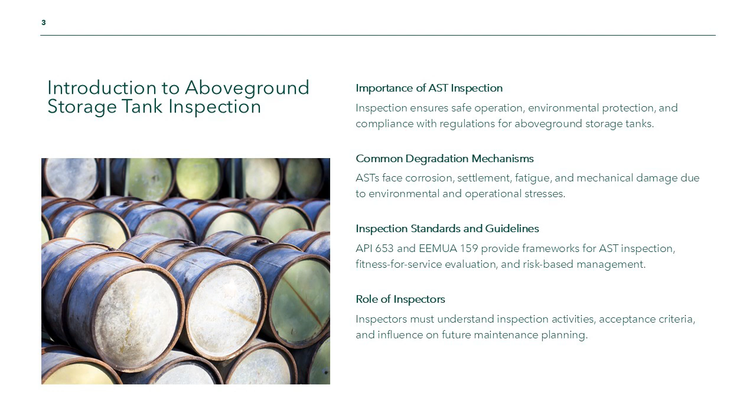The scope of AST inspection under API 653 and EEMUA 159 includes both on-stream and off-stream activities, each serving distinct but complementary objectives. On-stream inspection refers to examinations performed while the tank remains in service, typically focusing on external components, accessible areas, and condition monitoring techniques that do not require product removal.

The primary objective of on-stream inspection is early detection of deterioration, confirmation of continued fitness for service, and identification of conditions that may necessitate corrective action or an out-of-service inspection.

Off-stream inspection, by contrast, is conducted when the tank is taken out of service, cleaned, and made safe for internal access. Its objective is to allow detailed examination of the tank bottom, internal shell surfaces, welds, and other critical areas that cannot be adequately assessed during operation. Together, these inspection types support a life cycle approach to tank integrity.

API 653 defines minimum inspection intervals, examination methods, and acceptance criteria, while EEMUA 159 emphasizes inspection planning based on risk, degradation mechanisms, and consequence of failure. Inspectors should understand that inspection is not an isolated activity but part of an integrity management loop that includes data collection, assessment, decision-making, and follow-up actions.

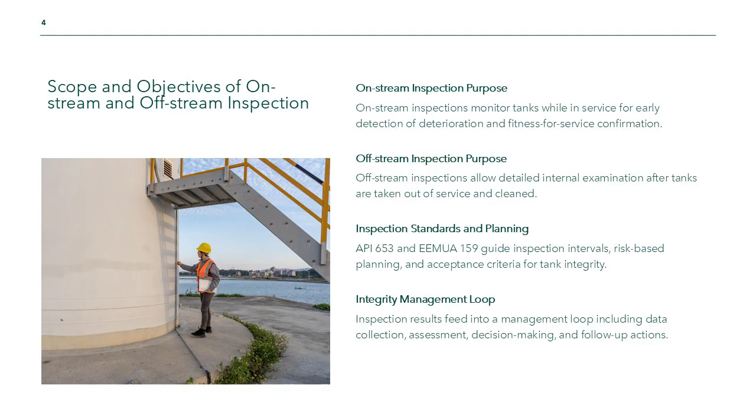API 653 and EEMUA 159 are the primary standards governing the inspection and integrity management of above-ground storage tanks. API 653 provides detailed, prescriptive requirements for inspection intervals, examination techniques, minimum thickness calculations, acceptance criteria, and repair methods. It is particularly strong in defining what must be done to demonstrate compliance and continued fitness for service.

EEMUA 159, on the other hand, focuses on integrity management principles, encouraging a holistic and risk-based approach that considers degradation mechanisms, operational history, inspection effectiveness, and consequence of failure. While API 653 is often used as the regulatory or contractual baseline, EEMUA 159 supports more optimized inspection strategies through risk-based inspection, RBI, and long-term maintenance planning.

Inspectors should be familiar with both documents and understand how they complement each other. In practice, API 653 requirements are typically treated as minimum standards, while EEMUA 159 provides guidance on enhancing inspection planning, prioritizing resources, and justifying interval extensions or alternative inspection techniques.

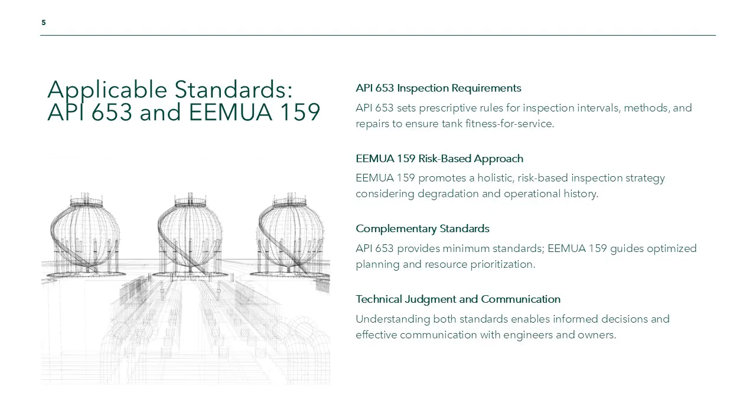Knowledge of both standards enables inspectors to make sound technical judgments, communicate effectively with engineers and asset owners, and ensure that inspection findings are evaluated within an appropriate integrity management context.

Purpose and limitations of on-stream inspection: external visual inspection of tank components, shell thickness measurement and corrosion monitoring, roof, settlement, and ancillary system checks. On-stream inspection plays a crucial role in monitoring the condition of above-ground storage tanks while they remain in service. The primary purpose is to identify visible deterioration, monitor corrosion rates, and confirm that the tank continues to operate safely within its design and assessment limits.

On-stream inspections help detect issues such as external corrosion, coating breakdown, leaks at nozzles, roof damage, settlement, and malfunctioning ancillary systems. These inspections also provide data to validate corrosion assumptions, update inspection intervals, and determine whether an off-stream inspection should be advanced. However, inspectors must clearly understand the limitations of on-stream inspection.

Internal components such as the tank bottom, annular plates, and internal shell surfaces cannot be directly examined while the tank is in service.

Indirect techniques, such as ultrasonic testing, UT, of the shell or settlement monitoring, provide valuable information but do not replace the need for internal inspection. API 653 specifies minimum external inspection intervals, while EEMUA 159 emphasizes understanding inspection effectiveness and uncertainty.

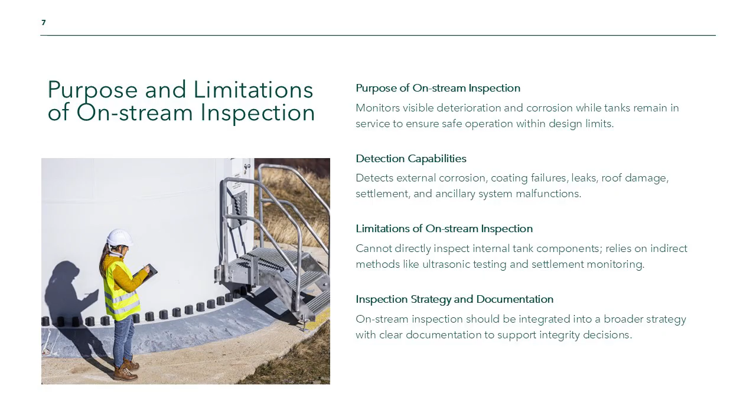Inspectors should therefore treat on-stream inspection as part of a broader inspection strategy, recognizing both its strengths and its inherent constraints. Clear documentation of findings and limitations is essential to support informed integrity decisions. External visual inspection is the foundation of on-stream tank assessment and should be conducted systematically and thoroughly.

Inspectors should examine the shell for signs of corrosion, coating degradation, bulging, denting, cracks, or product staining that may indicate leakage. Roof systems, whether fixed or floating, should be inspected for structural damage, corrosion, missing components, or abnormal deformation. Particular attention should be given to roof seals, pontoons, drains, and support structures.

Nozzles, manways, and flanges should be checked for leaks, gasket deterioration, and corrosion at the shell-to-nozzle interface. The tank foundation and surrounding area should be assessed for evidence of settlement, erosion, cracking, or inadequate drainage. API 653 requires regular external visual inspections, typically at intervals not exceeding 5 years, while EEMUA 159 encourages more frequent walkdowns based on risk and operating conditions.

Inspectors should use checklists to ensure consistency and completeness, take photographs to document conditions, and record observations in sufficient detail to support trend analysis. External visual inspection often provides the first indication of developing integrity issues and is therefore critical to effective tank management.

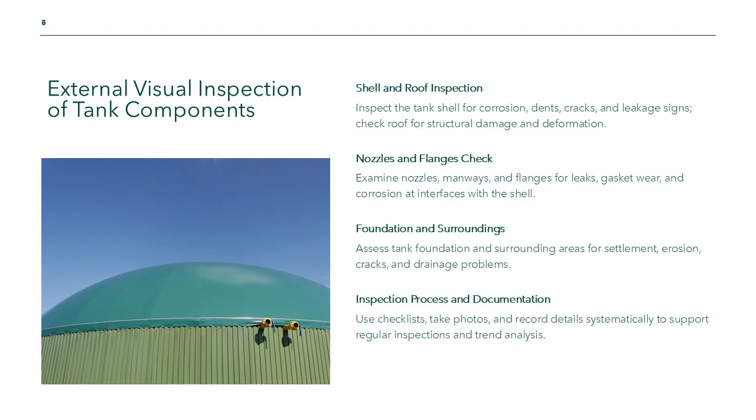Shell thickness measurement using ultrasonic testing is a key element of on-stream inspection under API 653. The objective is to determine remaining wall thickness, calculate corrosion rates, and verify compliance with minimum required thickness values. Measurements should be taken at representative locations on each shell course, with increased coverage in areas where corrosion is suspected or where historical data indicates higher corrosion rates.

API 653 provides guidance on the minimum number of measurements and the evaluation of results, including the calculation of remaining life and inspection intervals. Inspectors should ensure that UT equipment is properly calibrated, surface preparation is adequate, and measurement locations are accurately recorded for repeatability.

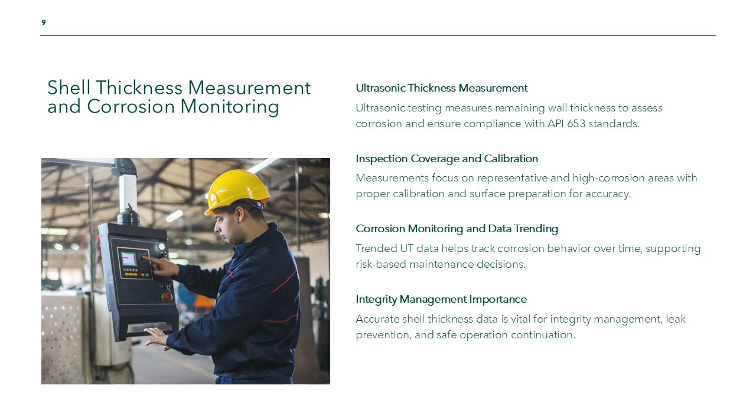EEMUA 159 emphasizes the importance of corrosion monitoring within an integrity management framework, including understanding corrosion mechanisms, variability, and uncertainty. UT data should be trended over time to identify changes in corrosion behavior and to support risk-based decision-making. Accurate shell thickness data is essential for ensuring structural integrity, preventing leaks, and justifying continued operation.

In addition to shell inspection, on-stream inspection must address roofs, foundations, and ancillary systems that contribute to overall tank integrity. Floating roofs should be inspected for pontoon integrity, deck corrosion, seal condition, and proper drainage, as failures can lead to product loss and emissions. Fixed roofs require examination of plates, rafters, columns, and vents to ensure structural soundness and adequate pressure relief.

Settlement monitoring is critical, as uneven settlement can introduce high stresses in the shell and bottom. Inspectors should review settlement survey data, visually assess foundation condition, and look for signs of distortion. Ancillary systems such as cathodic protection, fire protection, and overfill prevention devices should also be checked for operability and condition.

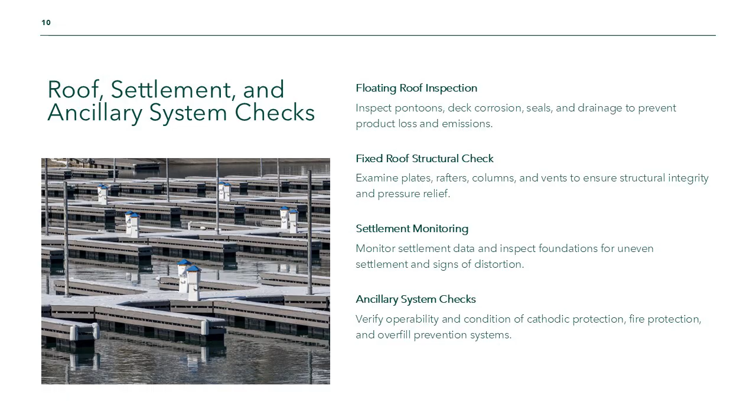API 653 references these elements, while EEMUA 159 places them within a broader risk and consequence context. Comprehensive on-stream inspection ensures that all elements influencing tank safety are considered, not just the primary pressure boundary.

Purpose and preparation for off-stream inspection, internal visual inspection of bottom and shell, tank bottom inspection using MFL and UT, evaluation, acceptance criteria, and hydrotesting.

Off-stream inspection provides the most detailed and reliable assessment of above-ground storage tank condition and is a cornerstone of API 653 compliance. The primary purpose is to enable full internal examination of the tank bottom, internal shell surfaces, welds, and critical zones that cannot be adequately assessed while the tank is in service. Proper preparation is essential to ensure both safety and inspection effectiveness.

This includes removing product, cleaning the tank, gas freeing, and confirming that the atmosphere is safe for entry. Confined space entry procedures, permits, and safety briefings must be strictly followed. Inspectors should review historical inspection data, repair records, corrosion rates, and risk assessments prior to entry to focus inspection efforts on the most critical areas.

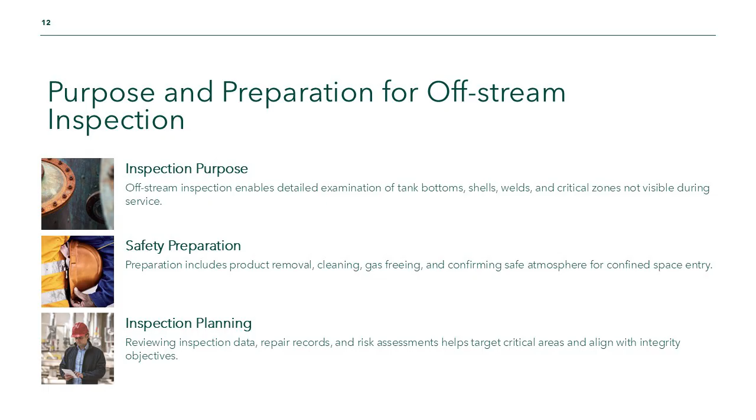EEMUA 159 emphasizes planning inspections based on expected degradation mechanisms and risk, rather than a purely checklist-driven approach. Effective preparation ensures that off-stream inspection activities are efficient, thorough, and aligned with integrity management objectives. Internal visual inspection is the first step once safe entry into the tank has been established.

Inspectors should systematically examine the tank bottom for general corrosion, pitting, grooving, and localized thinning, paying particular attention to the annular ring and critical zone near the shell-to-bottom weld. Evidence of underside corrosion, product contamination, or water accumulation should be noted.

Internal shell surfaces should be inspected for corrosion, coating breakdown, weld defects, and mechanical damage. Weld seams, including vertical and horizontal joints, should be closely examined for cracking or corrosion-related defects. Visual inspection findings guide the selection and extent of non-destructive examination such as MFL or UT scanning.

API 653 requires thorough internal visual inspection, while EEMUA 159 stresses understanding degradation patterns and their implications for future integrity. Accurate and detailed recording of visual observations is essential for subsequent assessment and repair planning.

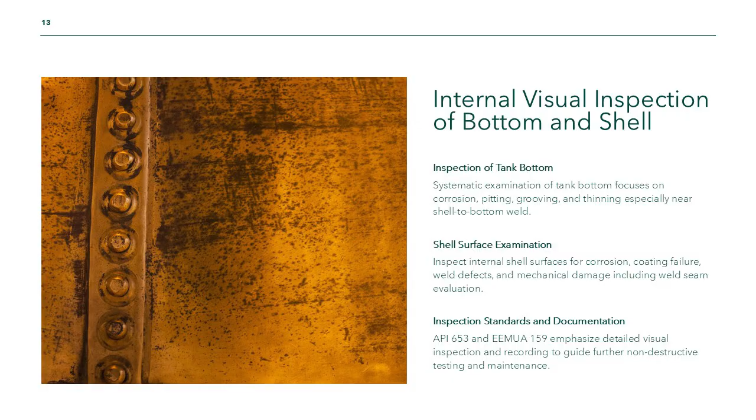Tank bottom inspection is one of the most critical components of off-stream inspection due to the high risk associated with bottom leaks. Magnetic flux leakage, MFL, scanning is commonly used to provide full coverage of the tank floor, identifying areas of metal loss, pitting, and corrosion.

MFL results should be reviewed by qualified personnel and followed up with targeted ultrasonic testing to quantify remaining thickness. UT measurements confirm the severity of indications and support fitness for service assessment. Inspectors must ensure proper calibration, coverage, and data recording for both techniques.

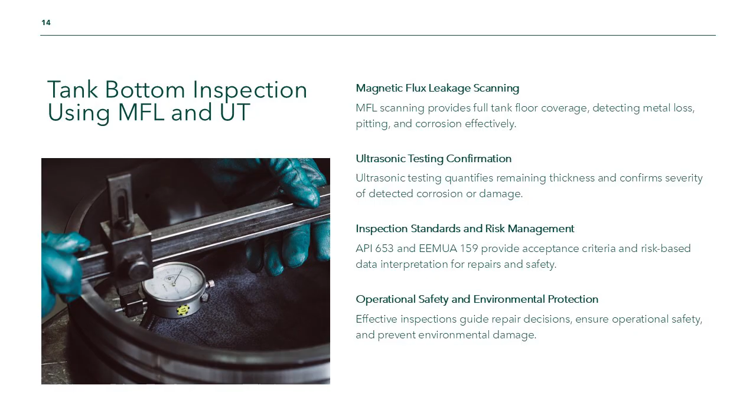API 653 specifies acceptance criteria for bottom thickness and guidance on repair or replacement, while EEMUA 159 emphasizes interpreting inspection data within a risk-based framework. Effective bottom inspection enables informed decisions on repair scope, remaining life, and inspection intervals, directly supporting environmental protection and operational safety.

Following off-stream inspection, inspection data must be evaluated against acceptance criteria defined in API 653 and guided by EEMUA 159 principles. This includes comparing measured thicknesses to minimum required values, assessing corrosion rates, and evaluating weld defects. Critical zones, such as the annular ring and shell-to-bottom weld, require particular attention.

Where repairs or major alterations are performed, hydrostatic testing may be required to demonstrate structural integrity and leak tightness. Inspectors play a key role in verifying that repairs meet standard requirements and that hydrotest procedures are properly executed and monitored, including settlement observations during filling.

EEMUA 159 encourages considering long-term integrity and risk implications, not just immediate compliance. Clear evaluation and documentation ensure that inspection results translate into effective integrity management actions.

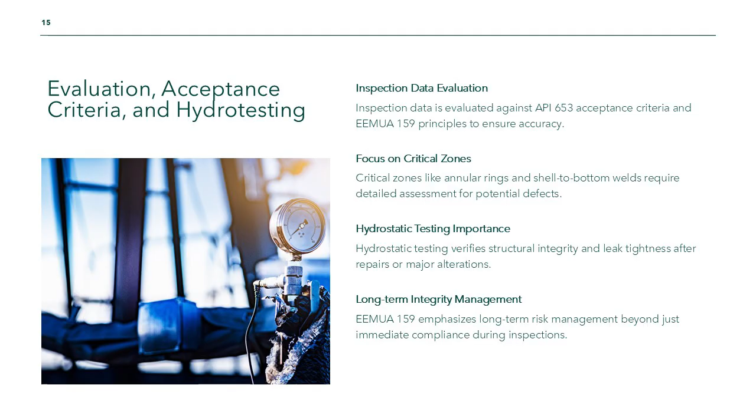Common degradation mechanisms in ASTs, non-destructive examination methods, documentation, reporting, and RBI integration, inspector competency and safety requirements. Understanding common degradation mechanisms is essential for effective inspection planning and execution.

ASTs are susceptible to uniform corrosion, localized pitting, microbiologically influenced corrosion (MIC), erosion at nozzles, and underside corrosion of tank bottoms. Environmental factors, such as humidity, temperature, and soil conditions, as well as operational factors like product type and water content, influence degradation rates. API 653 requires inspectors to consider corrosion mechanisms when selecting inspection locations and methods, while EEMUA 159 emphasizes identifying credible damage mechanisms as part of risk assessment.

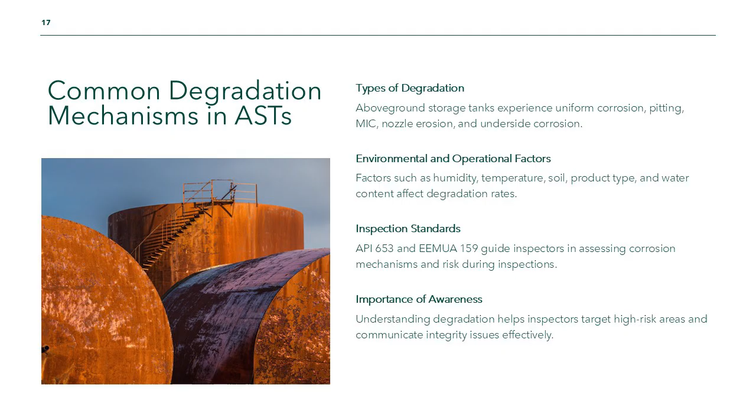Awareness of degradation mechanisms enables inspectors to focus on high-risk areas, interpret inspection findings correctly, and communicate potential integrity concerns to engineers and asset owners.

A range of non-destructive examination (NDE) methods is used in AST inspection to detect and quantify defects without damaging the asset. Common methods include ultrasonic testing for thickness measurement, magnetic flux leakage for tank bottoms, magnetic particle testing for surface breaking defects in ferromagnetic materials, and penetrant testing for detecting surface cracks. Advanced methods such as phased array UT may be used in critical areas.

Inspectors must understand the capabilities and limitations of each method, ensure they are applied by qualified personnel, and verify that results are properly interpreted. API 653 references acceptable NDE techniques, while EEMUA 159 highlights inspection effectiveness and reliability as key considerations in integrity management.

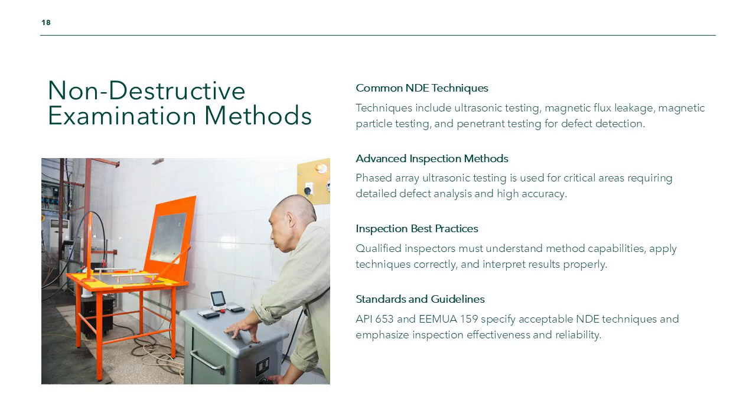Comprehensive documentation is a fundamental requirement of both API 653 and EEMUA 159. Inspection reports should clearly describe inspection scope, methods, findings, measurements, and conclusions, supported by photographs and NDE data. Accurate records enable trend analysis, support regulatory compliance, and provide the basis for repair and maintenance planning.

Inspection results should be integrated into risk-based inspection (RBI) programs, where applicable, to update risk rankings and adjust future inspection intervals. EEMUA 159 strongly advocates the use of RBI to optimize inspection effort and focus on high-risk tanks or components. Inspectors play a critical role in ensuring that inspection data is reliable, complete, and suitable for risk assessment and integrity decision-making.

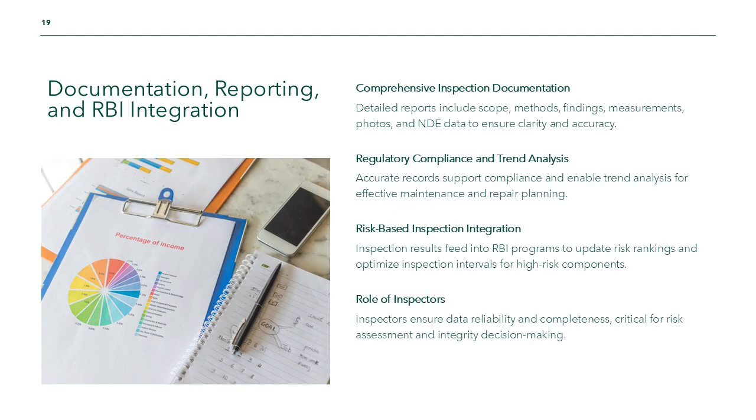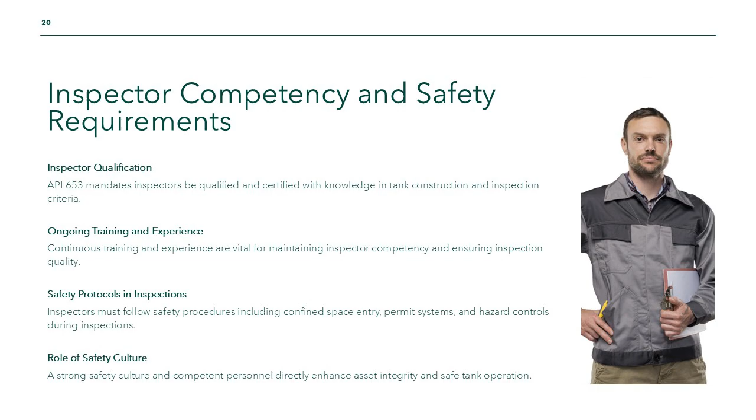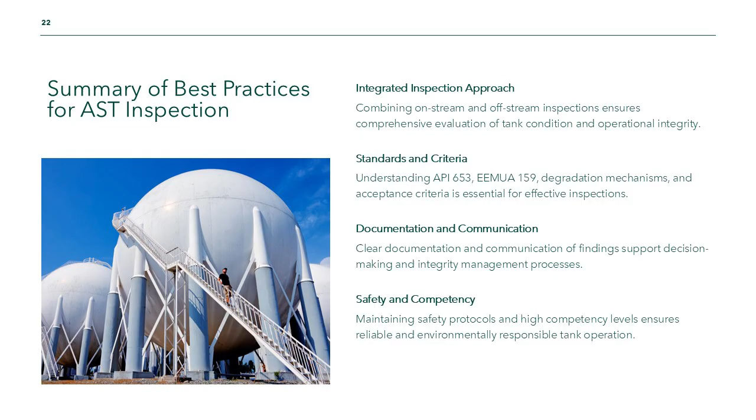By applying best practices and maintaining high standards of competency and safety, inspectors play a vital role in ensuring the safe, reliable, and environmentally responsible operation of ASTs throughout their service life.